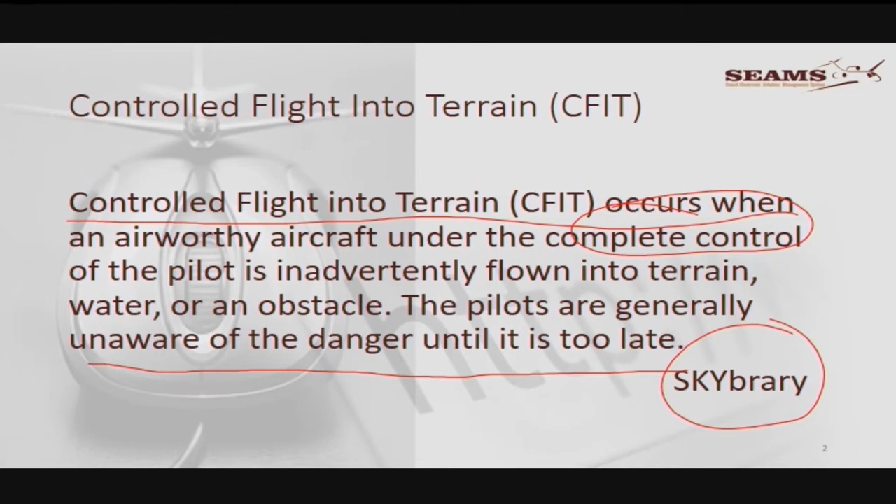All right, so let's just get the CFIT thing, that's all fine to understand the CFIT. And what I've noticed is just about all the accidents happened at night, in bad weather. If it's in the day, then it's in very poor weather conditions. But you know, there are the odd ones where people just didn't take notice.

Flight into terrain for a helicopter pilot, especially in the game industry, CFIT doesn't really fit in for a helicopter pilot, so I called it CFIS, controlled flight into something, because they normally hit something with the blades or with the tail rotor or whatever.

All right, so I need you just to, although we're looking at here, remember when you lose situational awareness, and that's a word that we use very loosely. But anyway, let's see what's actually the commonalities.

Night approach. All right, so the first thing is now we must start concentrating at night, night with marginal weather conditions, night VFR followed or during the final stages of the approach changes from IFR to VFR. You know, that's really like that.

If you're on an IFR approach, then you fly it up to the minimums as if you are, even if you can see, because if you change - and I really found that in the changeover, where we're sitting and flying IF, and now all of a sudden we are visual - then there are other traps, and we're going to talk about that, such as, for instance, the black hole phenomena. All right, we'll get to that one.

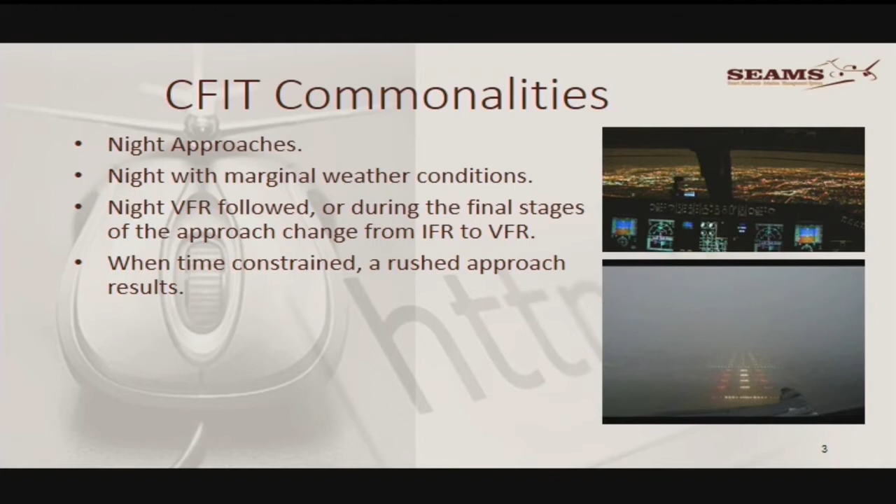When time's constrained, a rushed approach, and that you've seen many times because you pushed - you probably haven't got a night rating, you're going to get there after dark, you're rushing the landing for some other reason. Maybe you need to go to the toilet, I don't know.

No review of the approach plates, especially with reference to sector safety altitudes and clearances, and I really can't believe that, guys. If you're going to fly at night, and I know that you don't necessarily fly IF, but you've got to know what the minimum heights are. If you don't know the heights, then you're going to get trapped into them. You can't see them always, and you haven't got night vision equipment to see.

Yes, I know you've got all this fancy new equipment on board, but it's not 100% a guarantee, I believe. All right, then there I've got my black hole - all right, don't worry, that's not the black hole we're talking about - non-adherence to company SOPs.

So it's fine, now we're talking about airline stuff. Yeah, the guys are not following the SOP. But that holds too - if Wally or Conrad are going to fly aerobatics, they have their own SOPs as well. You don't overstep those. If you overstep those marks, you're going to pay for it somewhere along the line.

We really don't want you to pay for it. We want to celebrate 40 years, we want to celebrate 45 years, we want to celebrate 50 years, 55. I don't know how many years you will last, but let's say 50 years of flying. Come on, guys, we've somewhere along the line got to get this one.

If there's commercial pressure, that's always the problem, and the commercial pressure is sometimes self-made. So let's say I understand from a commercial operator's point of view, but many a times our business people must fly from point A to point B, and then it becomes a crisis. They put it on themselves. So be really, really very careful not to go out there and create your own pressures.

Those are the worst ones. As you know, the worst boss you can work for is yourself. Well, not everybody, but some of us. Now you understand what troubles I'm going through.

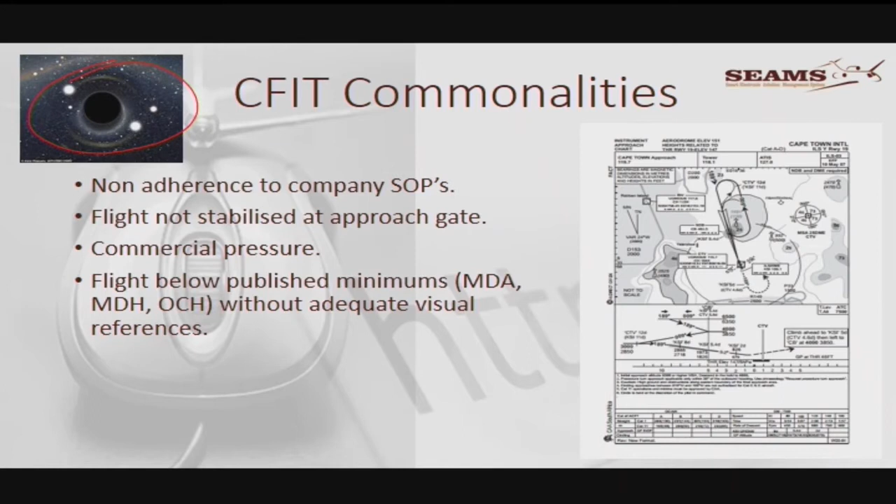Okay, flight below published minimums without adequate visual reference. Remember, I am taking it that you are qualified if you're flying instrument flying. And I know that sometimes we do it and we can - I know you've got good equipment. The problem is when the good equipment is not good anymore. All right, but I've spoken about that before, so let's just carry on.

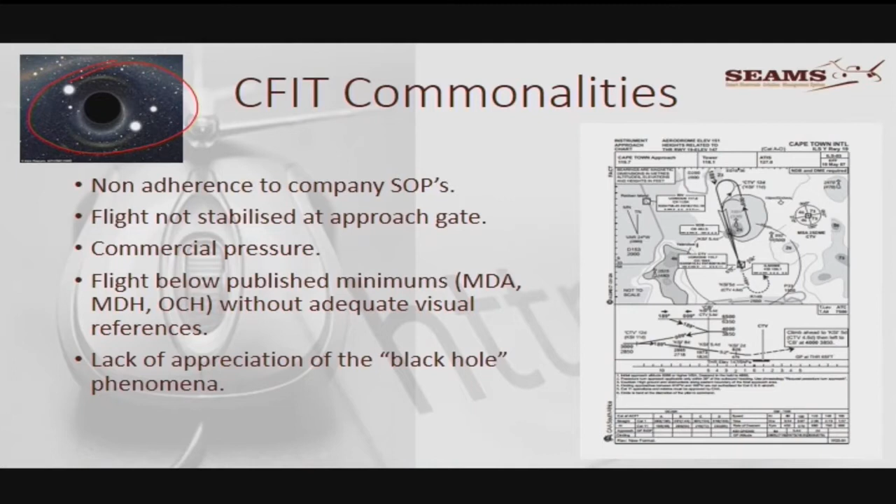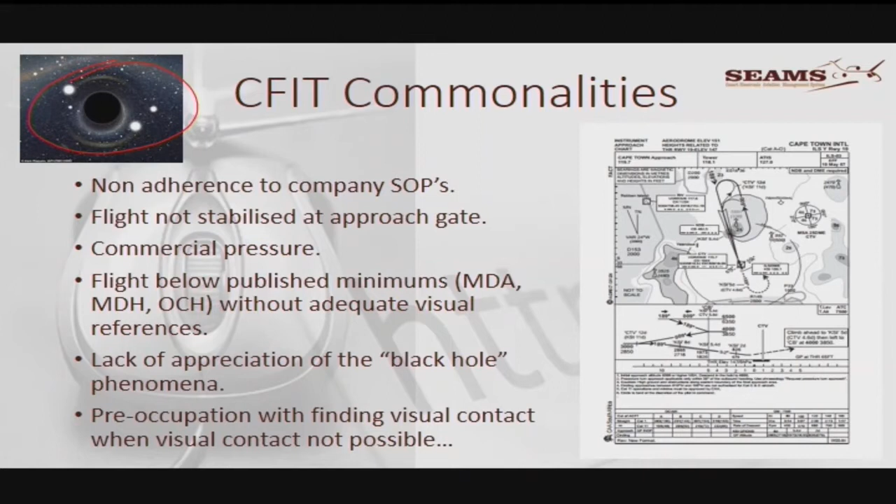Lack of appreciation of the black hole phenomena. Now, the black hole thing I'll show you now just in the next slide. Preoccupation with finding visual contact when visual contact is not possible. I mean, everybody is sitting outside, and this is where you get this meerkat attitude, and everybody's sitting outside looking, but they don't see anything.

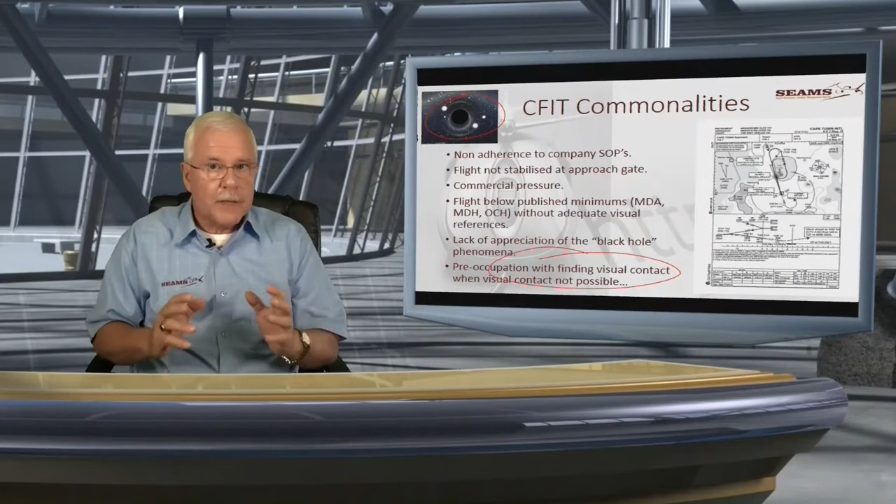The moment you start stretching your neck to look outside, you're not paying attention to the height, the speed, and all that kind of stuff. Just think about it a little bit. There are certain things one shouldn't do. But if I go over, I'll enlarge that one quickly for you.

You don't necessarily fly with extra eyes in the cockpit, and short of the runway, that black hole is sometimes so intimidating. By the way, most aircraft that fly into the ground do so on final approach, nowhere else. That's what they do. That's also true for helicopter guys playing around in the mountains, such as Brandy was telling you about. Remember, he said he was so lucky he survived that one.

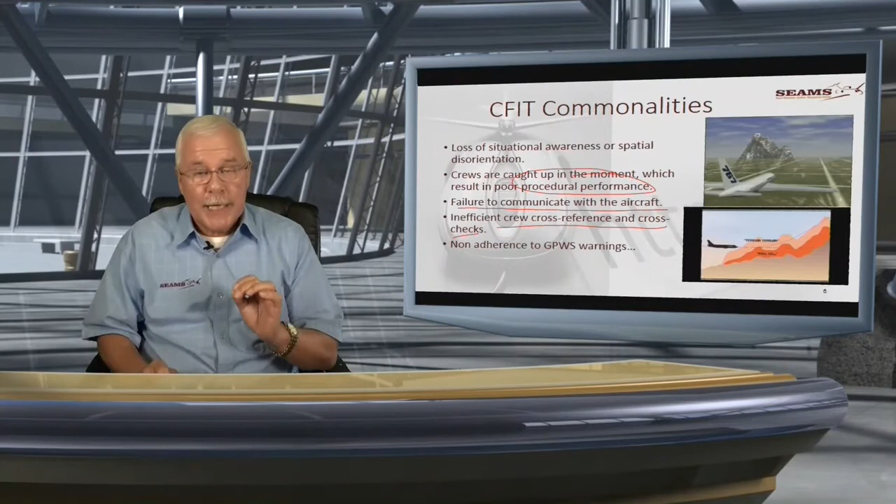Yes, you're going to get to the point where you think, I can do that. The difference is, I've been trained to do these things, but that aircraft is not cleared to do it. So now I've got a choice: either I can go with what I think, or I can go with everybody else. I don't want to go with everybody else. I want to go with the rule, the regulation, because that is the only way I can show my self-respect and have the best chance of survival.

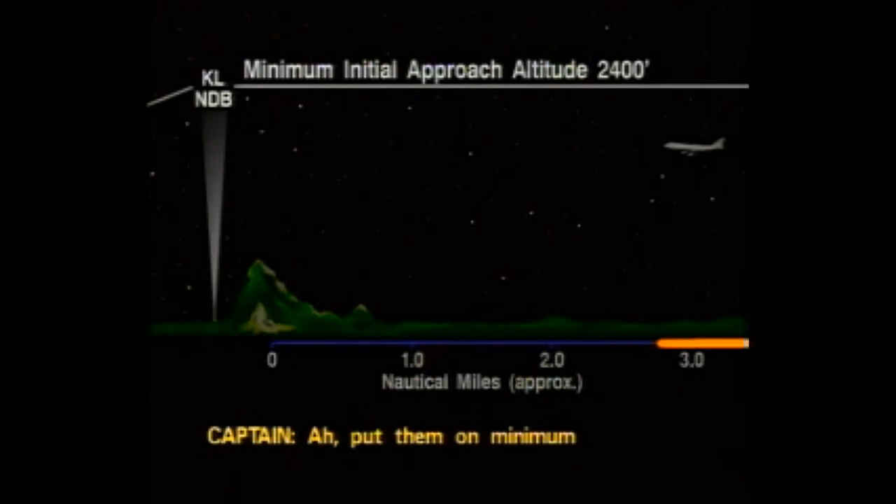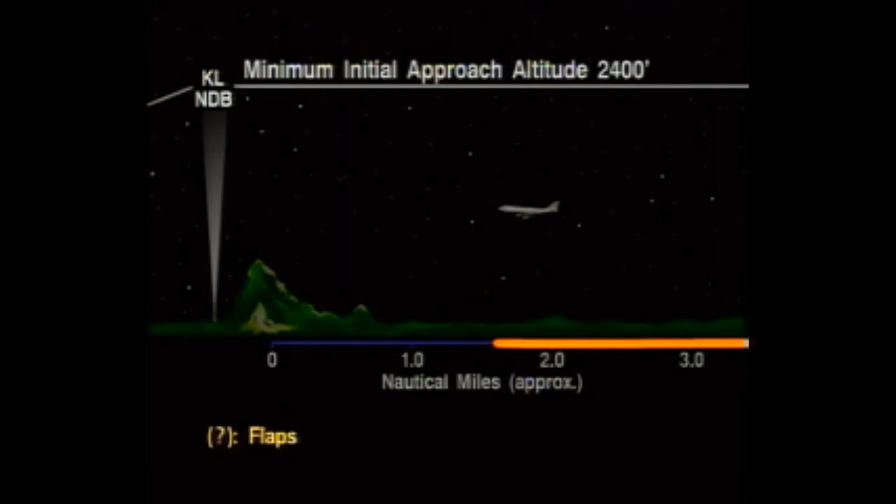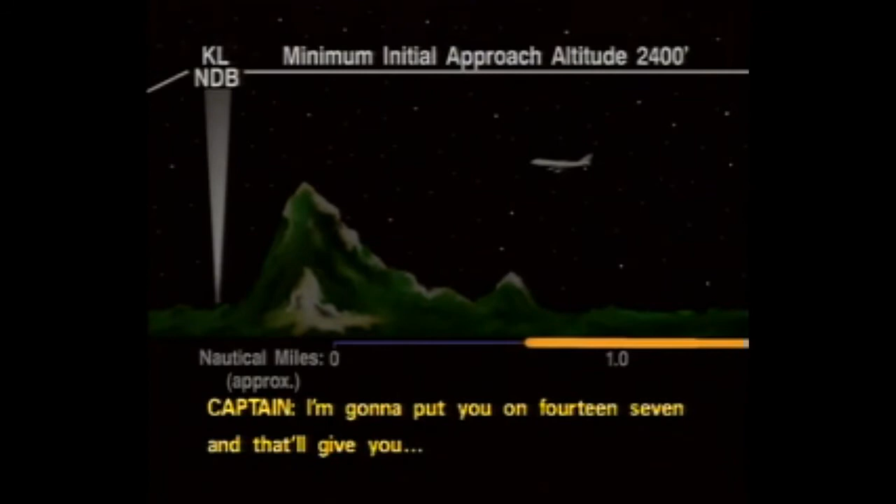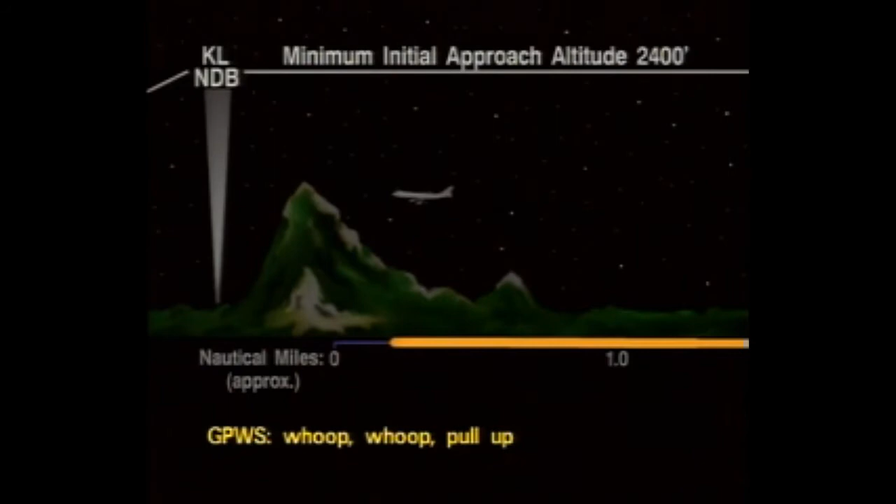Master your situational awareness. When I take away that picture and you try to actually visualize everything that's in this specific picture in the background, it's amazing. There are so many things we're actually not really aware of, but it's there. So we are not superhuman. That's what they call us, humans. They don't call us superhumans. The super part of human is a figment of your mind.

You've got something wrong in your mind if you think that you're better than the rest. You're not. We all bleed the same. We all stumble the same. And that's why there are rules and regulations - not to spoil your sport, but to keep you alive. And I've said that many times. It's nothing to you if you die, that's not going to be a problem.

But the people that you leave behind - I don't want you to leave me behind, and I don't want to leave you behind. So I've got to pay attention too. Everybody gets to pay attention. You say old and bold pilots don't exist, not old and bold, and all that kind of story. Sometimes we are lucky, all right, but mostly if we pay good attention, we'll be better off.

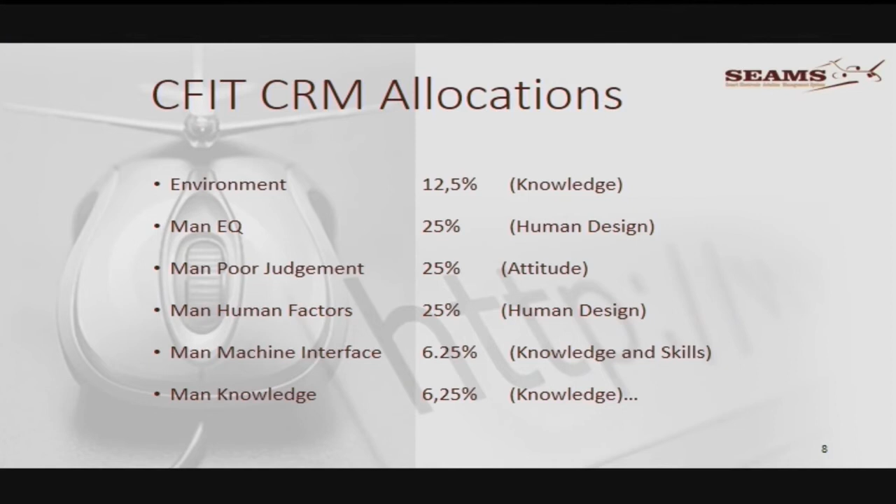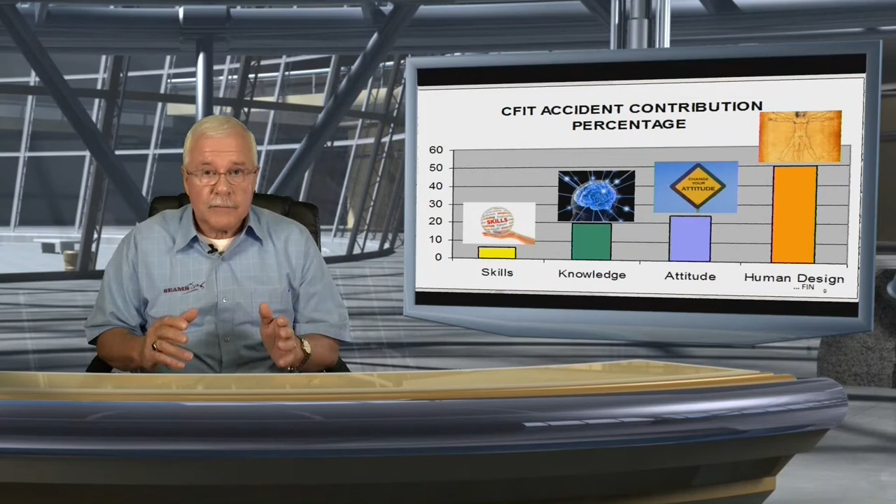This is now the contribution. Remember, in this case there are no technical problems. In CFIT, the aircraft is in 100% condition, everybody's in 100% condition. The only problem is that they run out of sky. And normally the aircraft is on the losing part of this.

But if I had to put a causality to it, what I found is that the least of our problem is actually the skills. When I get there, people say 'yeah, but they're PPL and they can't fly.' They can fly - it's that they fly outside the scope they were taught to fly in. If you stick to what you've been taught, you'll be really okay. And then this figure can come down to zero. It's not such a big deal.

But I need you to understand that that is the important one. Look here, skills - that was about 6%, if I've got it right. And this is about 19%, just about 20% here. So between these two, you're looking at a full 25%.

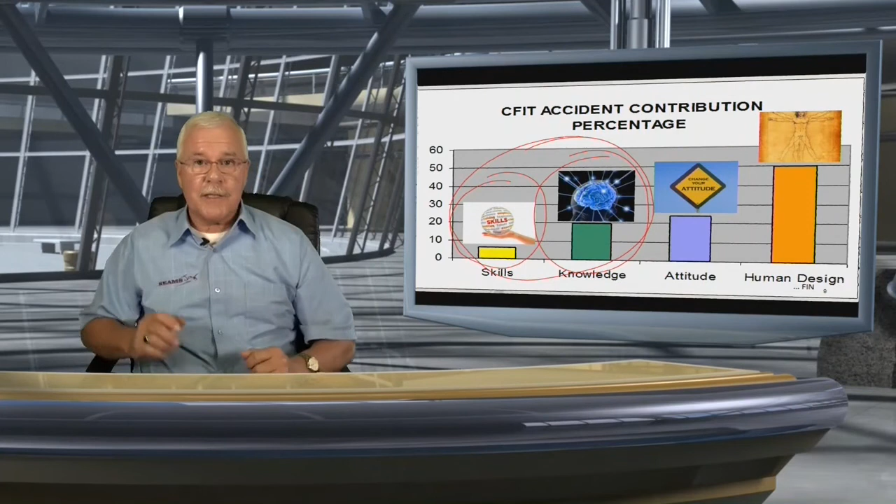Knowledge - listen now, when I did the CFIT study, it was the real guys. Yes, it was the airline pilots, the ATPLs, the CPLs with a lot of experience. This is where it comes from. There's no PPL in here. But remember, it holds good for everybody.

A lack of knowledge - I can't believe it, people don't understand the letdown plates, how you're going to fly. And then, attitude. When I did this attitude analysis, I said okay, if you willingly and knowingly stepped over the line, that's bad attitude and that's ill discipline. That was a full 25%.

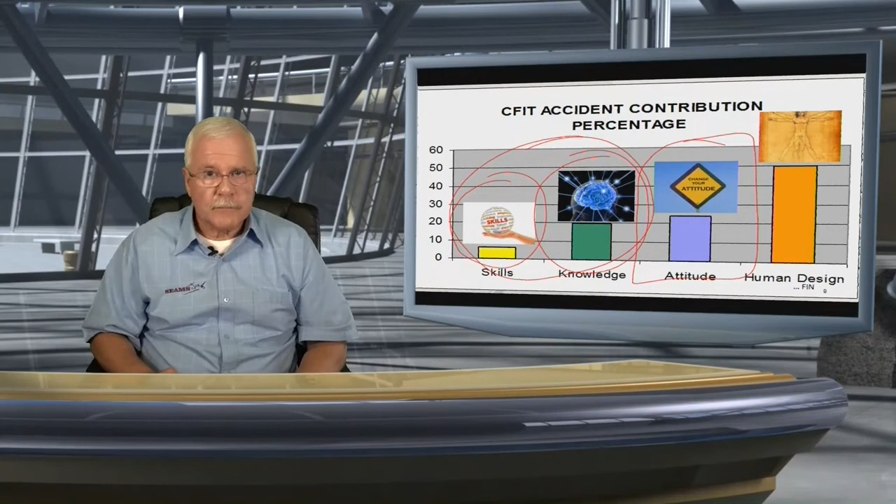And then I got stuck, because with these you've got 50% of the accidents covered. And then after a while I realized it's not human factors, it's human design. If you add all these things, then you get to human factors. But I just wanted to say that human design is that you cannot walk on water, neither can you float in the sky except with proper wings and an engine, or maybe a proper glider. But if the cable breaks, you're gone. If you do not know the ground is coming up, you're gone. The ground will win every time.

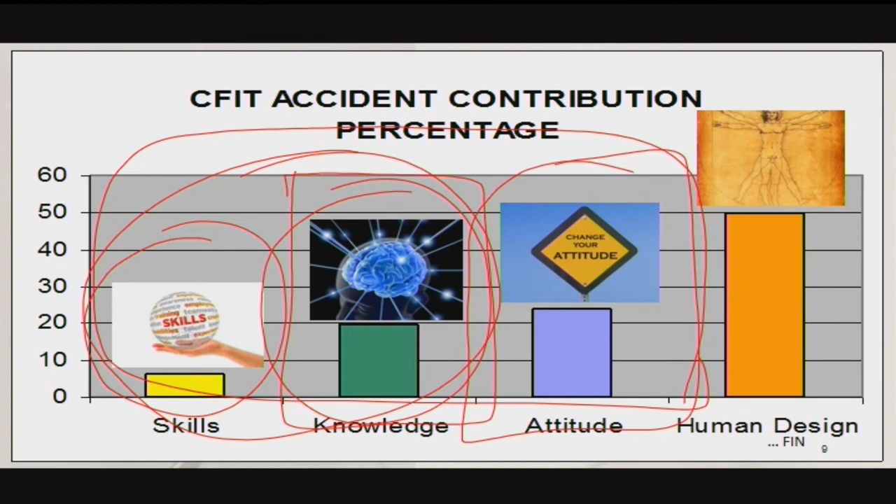Okay, but now the question is, what do we do about this? I just want to focus quickly on this knowledge thing. How do we overcome it? Because remember, you say to me, but 50% is because we are just humans. All right, if we can cut out the other 50% of accidents, we've gone a hell of a long way. So how do we do that?

I'm just going to give you one word there, and let me write it - planning. Why do we plan? We plan to reveal to us what the shortcomings are. Only planning can reveal which knowledge I haven't got, or the skills that I do not have. Only planning can do that.

Yeah, but we're doing it every week. Okay, you can have the same plan, but you must check the plan and you must stick to the plan. That's fine, but a lot of times we go out and do haphazard flying. Now these guys aren't haphazard flying - I mean, these guys are really going to do letdowns. But poor preparation leads to poor performance. Just poor performance, yeah, that one. All right, okay.